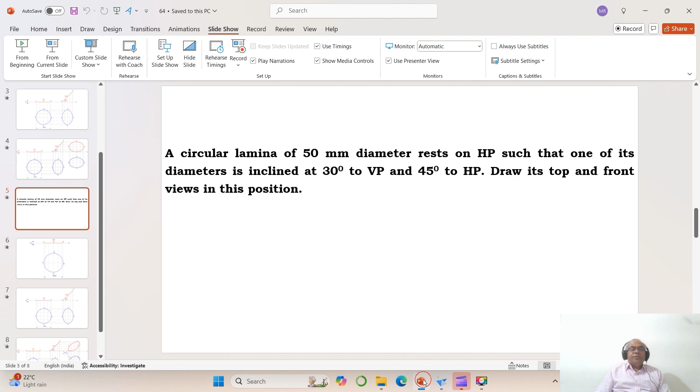Right click and go to move, disable copy, select this and place it wherever you want. Go to zoom window, bring it near to the screen. Before actually creating the drawing, make sure endpoint, intersection and horizontal or vertical are enabled and remove the center point. All other options should be disabled.

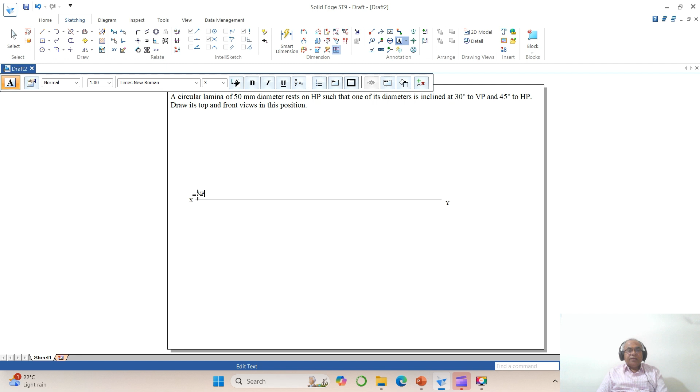First I need to draw the XY line. Go to line, select this and make it 0.05. Draw one XY line of any length and now go to text. Take the font as 3, put the caps lock on, type X, and here it is Y, here capital VP and here capital HP. Right click, then go to zoom window.

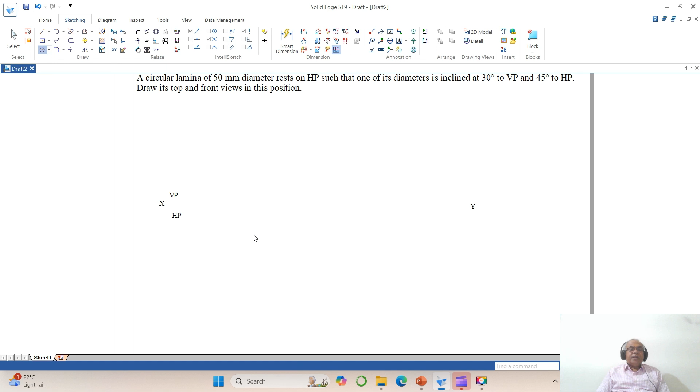We need to draw the 50 mm diameter. So go to circle, take some arbitrary point, take the diameter as 50. Right click. Then go to move, disable copy, select this and take it inside here. Then go to fit. Now select to check the diameter. The diameter is 50, so the radius is okay.

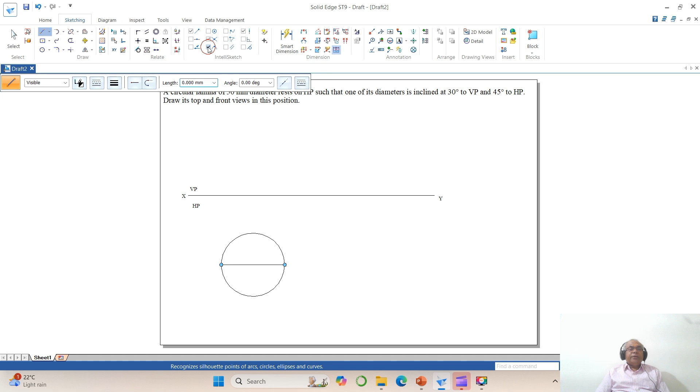Now we want to draw a horizontal line to this. To do that, enable center point. Go to line and click on the center point, or we can go to silhouette point first. Silhouette point draws from quadrant to quadrant. Once you do that, remove silhouette point and enable center point. Now go to the rotate option, enable center. Select this, take the center of this.

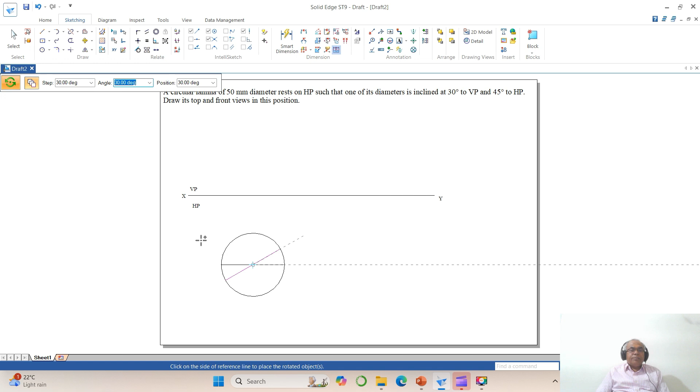What is the angle you want to rotate? Since I want to divide it into 12 points, 360 by 12 is 30. The position is 0 now. The step you want is 30 every time. So enable copy now. Click, and now click on this, then this, then this. So you have divided this into 12 equal points. Now select this and make this 0.5.

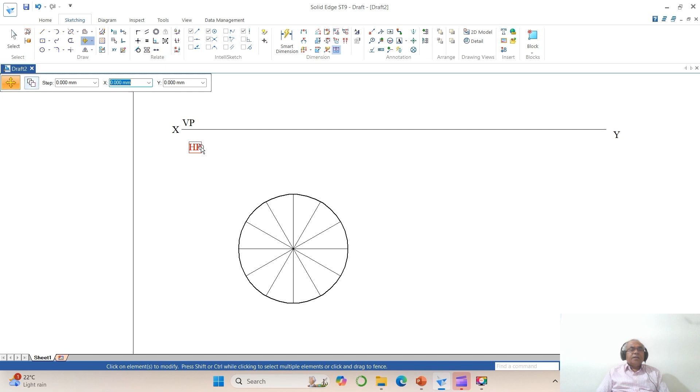Now we have the points. Go to move, disable copy, take X, VP and HP. Again go to text, type small letters a, d, g and k. Then go to move, select this and keep it here: d, then k, then g.

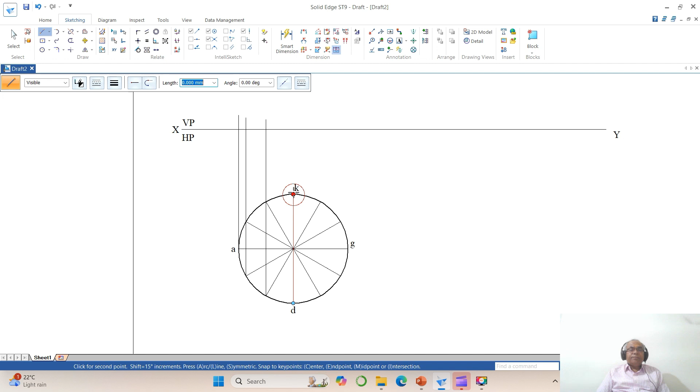Now we go for the line command. Draw a line from the endpoint to the XY line. Similarly from here, then from this point, and from here. Now go to trim. Trim this entire thing by keeping it like this. Now go to split. Split this line till here. Now select by holding this, make it 0.5.

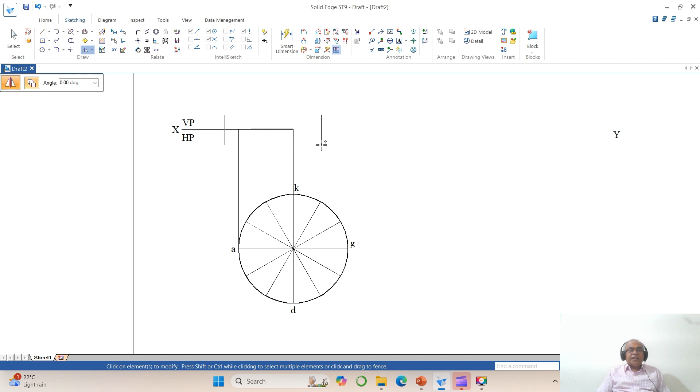Now split all other lines between these two. Split here, then split here. Now go to mirror, select by holding the shift key, select this entire thing, then this line and this line. Mirror, enable copy, with reference to this, copy it. Now we have all these lines. So 12 points we have divided.

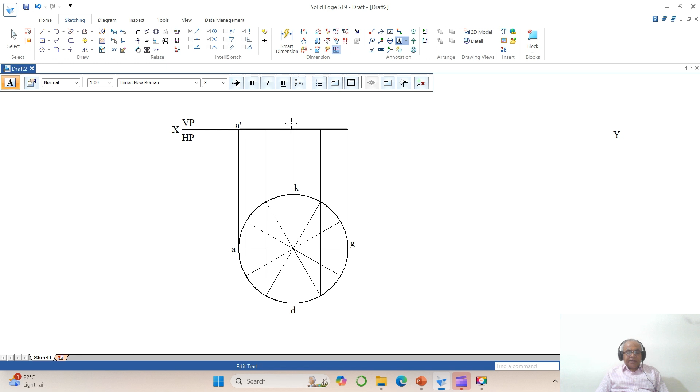Now go to text. Here type a dash, here d dash, then g dash, then k dash. Now go to move, disable copy. Select a dash, then place d dash and k dash, then g dash. Now we want to make it a group. To do that, I will go for the group command. Select this entire thing, which makes it a group.

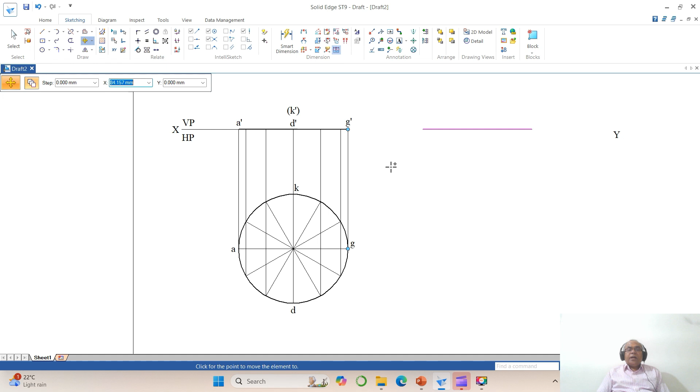Now I want to copy this to the second position. So go to move, enable copy, select this and you copy to the next position. By tabbing it, make it 0 and place it wherever you want. Okay. Now once you do that, you go to fit.

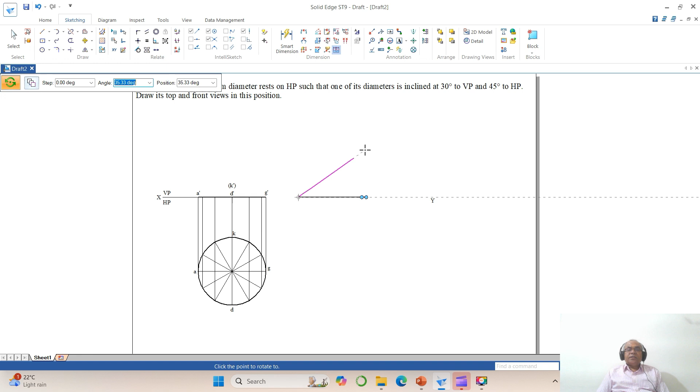So one of the diameters is inclined at 30 degrees to VP and 45 degrees to HP. Now you go to rotate, disable copy, you select this entire thing, take this endpoint to this endpoint, the rotation angle is 45 degrees to HP. Okay. Click right on this. And then go to line, take endpoint and draw a horizontal line of any length. So then go to move, disable copy, you select this and move it here.

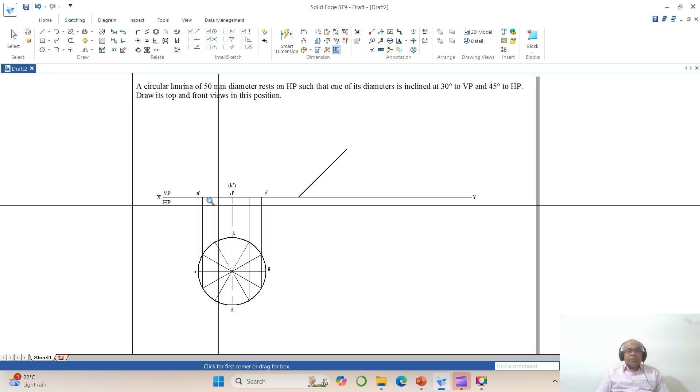Okay. Now you come down to zoom window. Now you go to line, take endpoint and draw a horizontal line. And the first endpoint is this, which is the intersection point. And similarly from here you take endpoint. Okay, then go to trim corner between these two and also between these two.

Now you go to move, enable copy, you take A dash and you keep it here. And similarly you take G dash and you keep it here. Now I will go to line, you take endpoint and draw a vertical line. So then go to move, take D dash and here you take K dash. Okay. This point is over.

Now we go to line, take this endpoint and draw a horizontal line and similarly from here you take this and go to trim corner between these two and also between these two. Now you go to line, draw a line from endpoint of this, similarly from endpoint of this, which is these 2 points. These 2 points will start from here. This is the one and also this is the one.

How do I know that it is these 2 points? You can see after A dash you have the next point. After this you have this point. This point and this point is same, which is that point. That point lies here. So that is how we are identifying. So then go to trim corner. So here I will take these two, then I will take these two, then I will take these two.

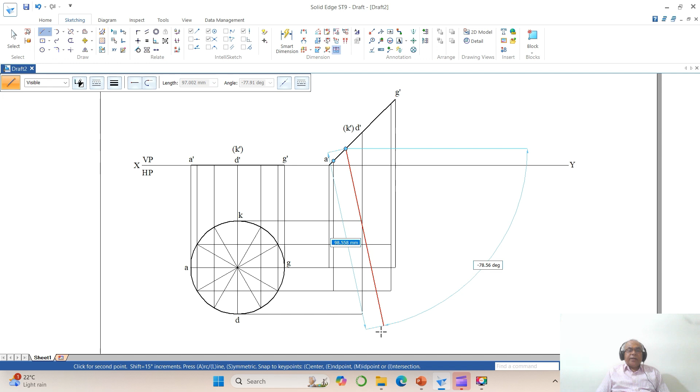Okay. Similarly, go to line and you take this endpoint and similarly from here, this endpoint, you draw this. Then you take the end point of this. Similarly from here, end point of this. Okay. Now you go to trim corner between this and this, and similarly between these two, and similarly between these two. Now we have completed the projections.

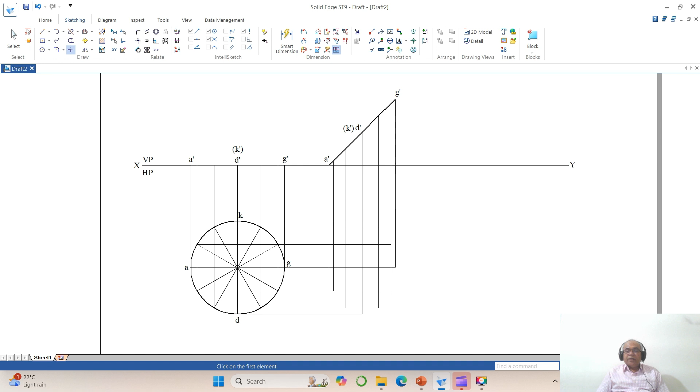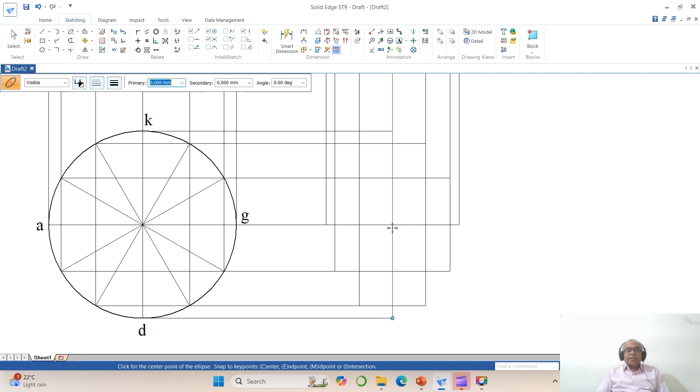Once you do that, now you want to go to ellipse. So go to circle. In ellipse by center point, you take this intersection to this end point. So what is this distance? It is going to be 25. Okay. Sorry. Go to ellipse by center point. You take this intersection point as the center and this end point for the primary axis. Now the secondary axis is this line, okay, which is 25.

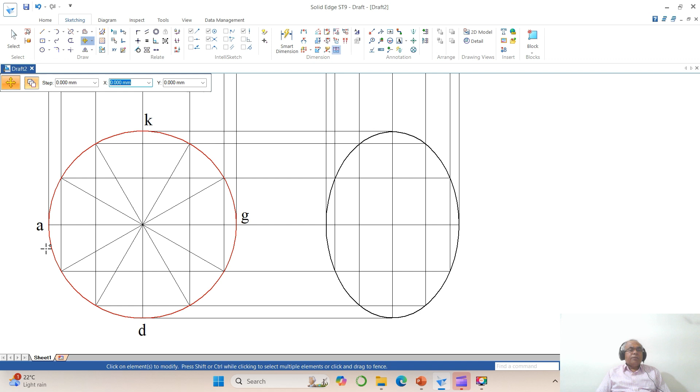Okay, now we have the point. Now you go to select. By select this, make it 0.5. Now I want to split these things. So you go to move, okay, enable copy. You take A and keep it here. You take D and you keep it here. Then you take G and you keep it here. Then you take K and you keep it here.

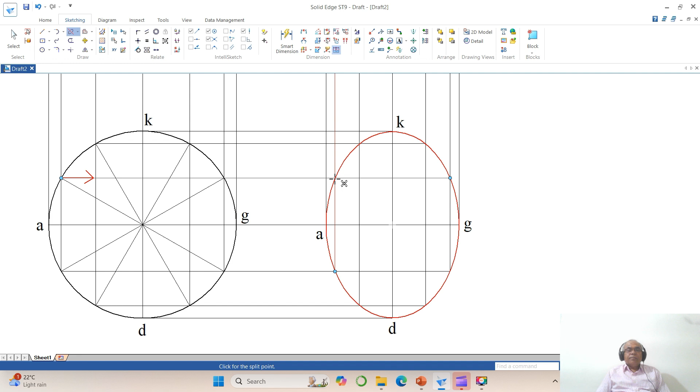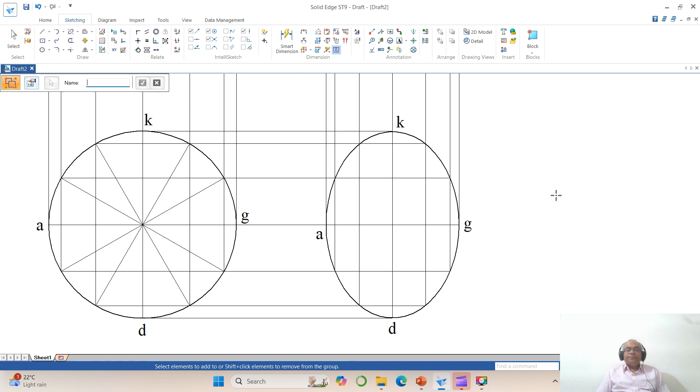Now you go to split these horizontal lines first. Okay. Then take all horizontal lines. Now you take the vertical lines. Now you go to group, select by holding the shift key, you select this and then you select all horizontal lines first. Then you select all vertical lines second. Okay, once you do that, you group it. Now we have fit.

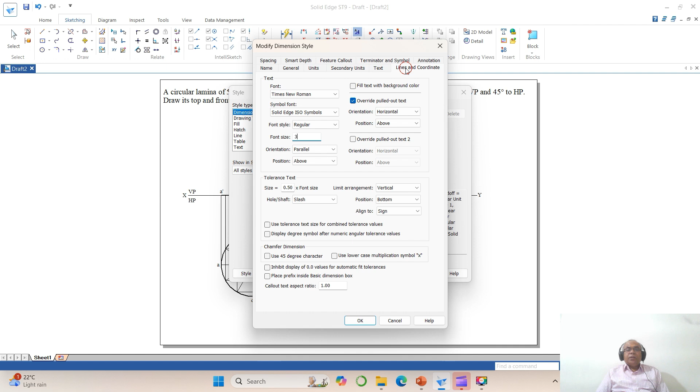So now I want to go for dimensioning styles. Go to ISO, click on modify, go to general, make everything black. Okay, come down to text, make it Times New Roman. You take font size as 3, then go to lines and coordinates, make it 0.1 and come down to units. So angular degrees is rounded off to the second decimal point. Okay, and apply.

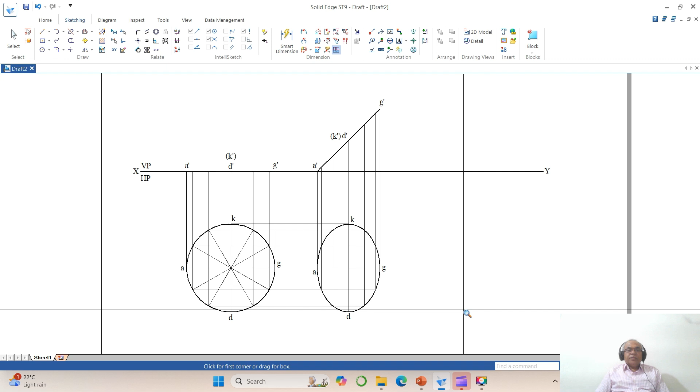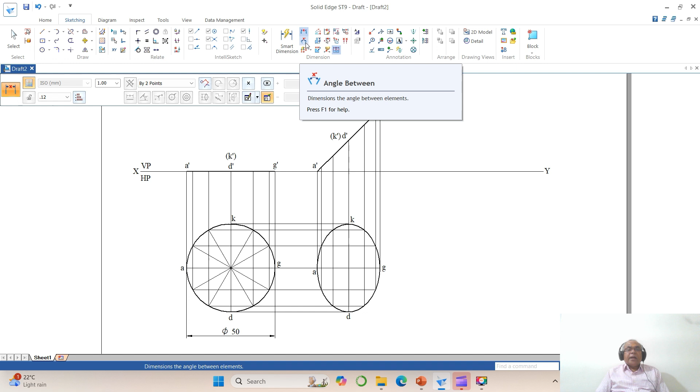Now I want to show the dimensions. So to show the dimensions, go to distance between, you select on this and you select on this. So I want the diameter symbol. You just go to this, click on diameter, okay, so you are going to get the diameter symbol now. Now we want to go for angle between, select this line and you select this line. So I don't want the diameter symbol there. So go to clear and say OK. Now we will get only 45 degrees.

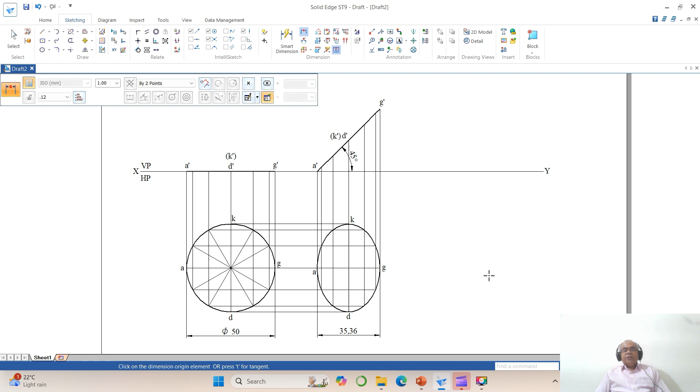Now I want to show this dimension. So to do that, you just go to distance between, select this line and this, you are going to get it as 35.36. Now 45 degrees to HP is over. Now what I want, 30 degrees to VP. So I will go for a line command, consider any point. From there I am going to draw about 100 mm. The angle is minus 30.

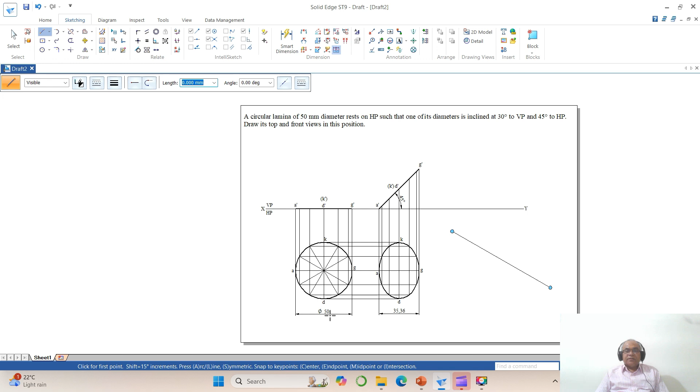Okay. Once you get this, on this, first I need to take this 50 mm diameter. So how to do that? So here first I will go for point on element, enable that, and go to arc command by center point, select some arbitrary point.

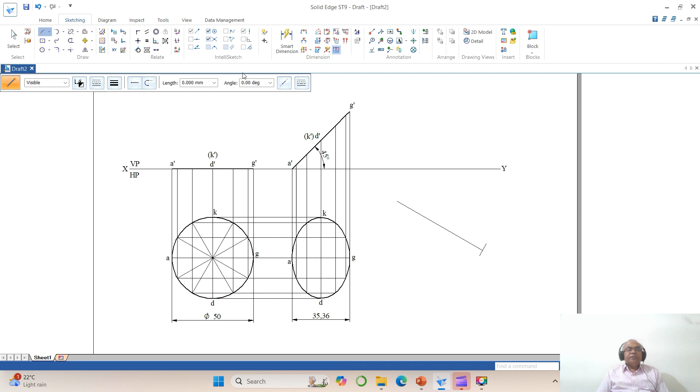From there, what is the radius you want? 50. What is the sweep angle you want? 10 degrees. So you click on this and you keep it on this. Now we have trim, go to trim, remove this, and then go to line, remove point on element, enable center point. So here you take endpoint and draw a horizontal line.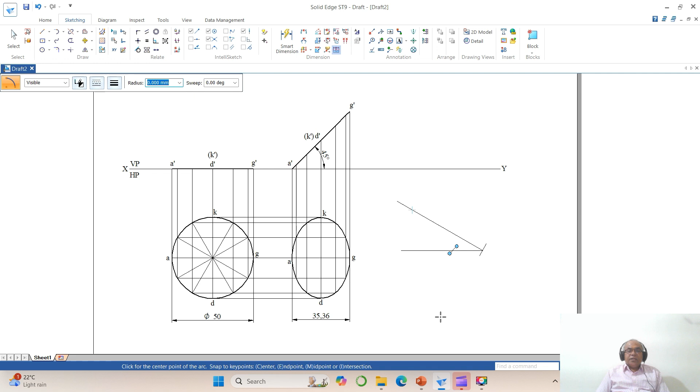Now to this I need to consider the second position, which is 35.36. Again you go to arc command by center. So select this on the circumference of the arc, then automatically you will get to the center here. So what is the radius you want? The radius is 35.36. What is the sweep angle? I want 10 degrees. Click on this and bring the arc on this locus line. Then once you do that, you remove this. It's not required now. It's finished.

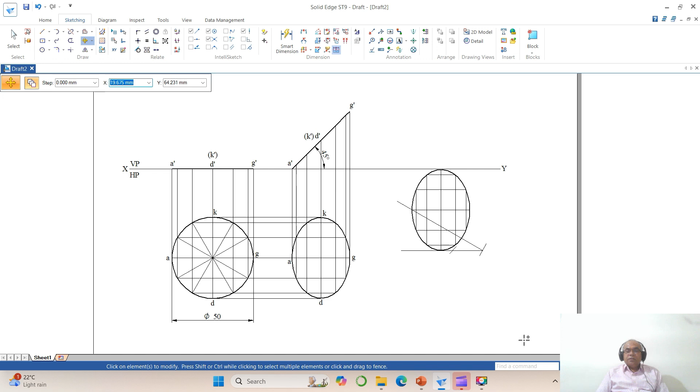Now I want to move. Move, enable copy. You select this. This endpoint should lie on the center of this. Okay, I got this. Then go to zoom window. So one point is fixed now. I will go to rotate, disable copy. You select this. I want this endpoint to lie on this intersection point. Okay. Now we have the drawing.

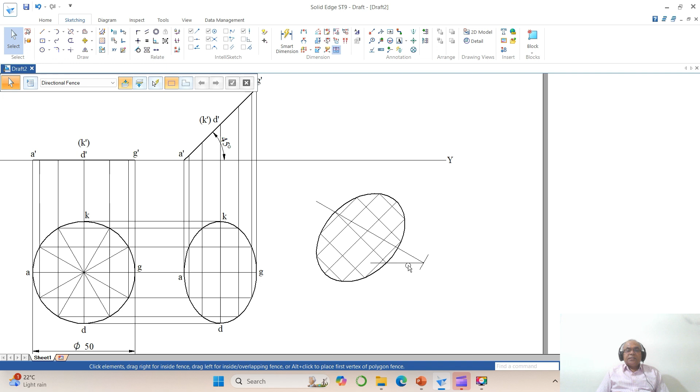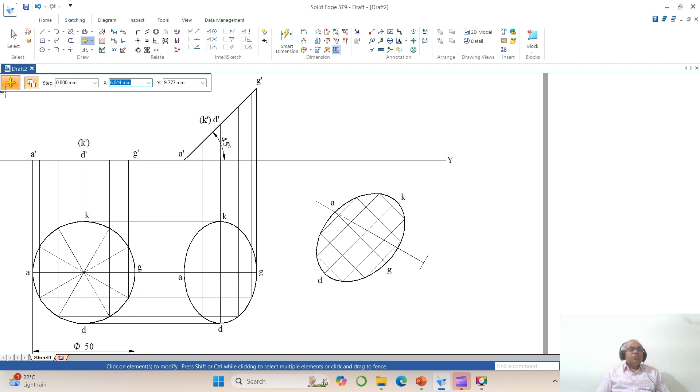You go to split this line. Go to erase, delete this. Okay. Now I will select this line and make it a dash dot line. Once you do that, now we go for move, enable copy. You select this A onto this, then D onto this, then G onto this, then K onto this. Now I want to start projecting it to the front view. So go to line, take endpoint and draw a horizontal line.

Similarly, go to line, take endpoint of this. Similarly, endpoint of this. Okay. Then go to trim this line here. Then go to trim corner between these two. Then you go to line, take endpoint of these 2 points. These 2 points will come on this side. Okay, similarly on these two. Then go to trim corner between this line and also between these two.

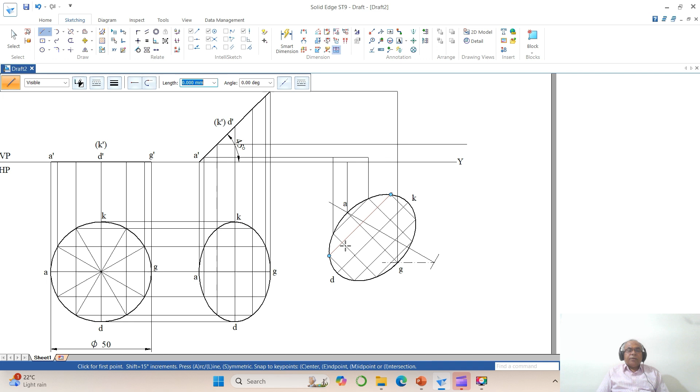Then again go to line, take an endpoint. Which are those 2 endpoints? That is this point and similarly on this side. And go to trim corner between this line and this, between these two now. Similarly, go to line and take endpoint of this. Which are those 2 endpoints? That is from here. Similarly from K. Okay. Then go to trim corner between this line and this line, between these two now.

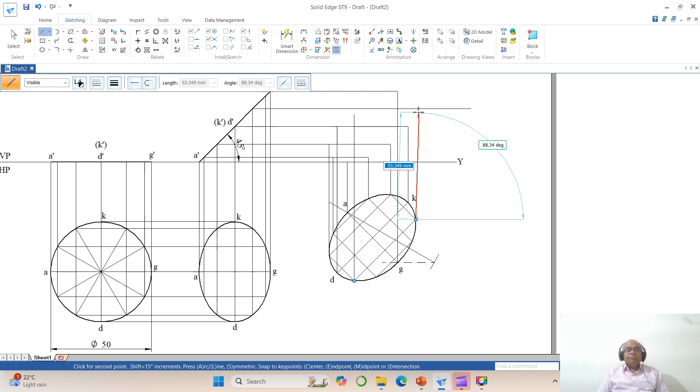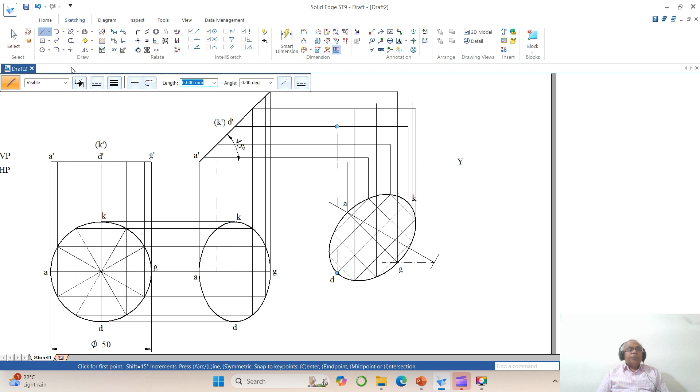Similarly, line, take endpoint. Which are those 2 points now? It is this. Similarly from this side. Okay, go to trim corner between this line and also between these two. Then go to line, take endpoint and draw a horizontal. Which are these 2 points? That is from here and also from here. Then go to trim corner between this line and this and also between these two.

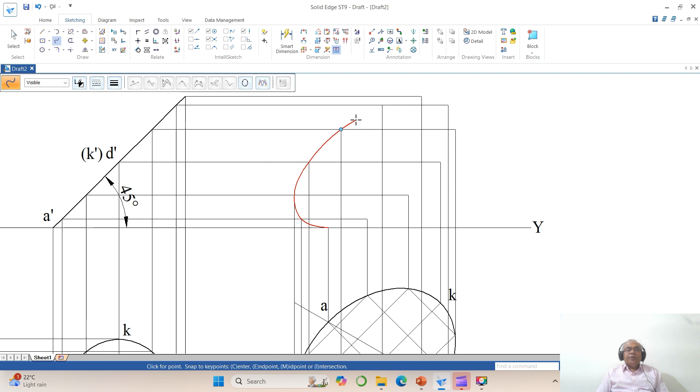So once you do that, now we have all these 12 points projected, and now you go to curve, take endpoint of this to endpoint of this to endpoint of this to endpoint of this. So you are joining all these by means of a smooth curve. Okay, then right click. Then select this line and make this 0.5. Okay. Now we need to write the text.

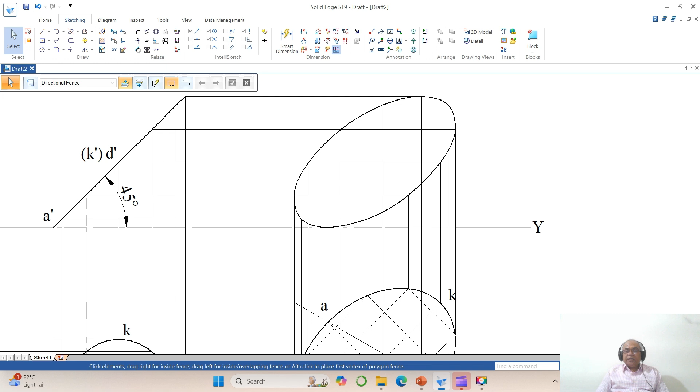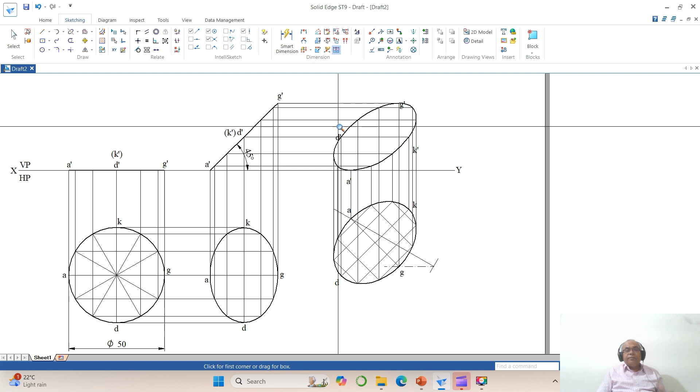To do that, go to text and here you type A dash, then D dash, then G dash, then K dash. Now I need to zoom and go to move, disable copy, take G dash, here D dash, here A dash, then K dash. Once you do that, we go for select by holding the shift key. Select this line and make this 0.13.

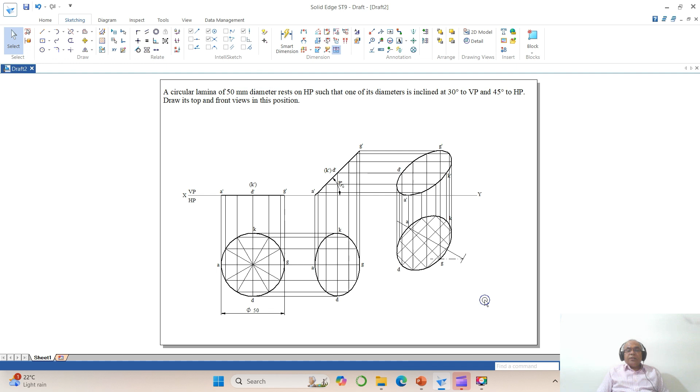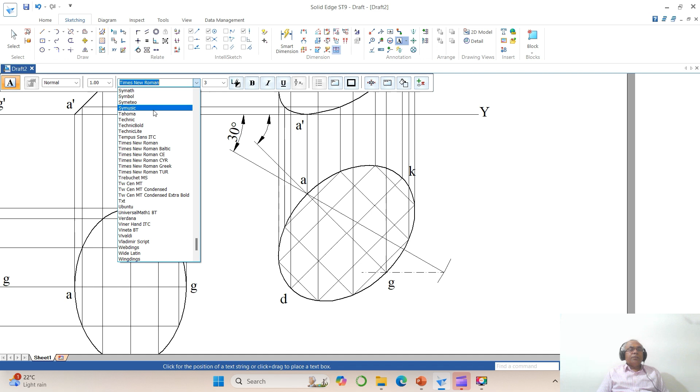Now we go to zoom window, bring it near to the screen, then go to distance between this line and this, which will be angle 30. Now again you go to nominal, make it blank. So again go to distance between this line and this. You don't show anything there, but go to text and select symbol, and here you type small letter beta, small letter b. Then go to move, disable copy, and make this the beta inclination.

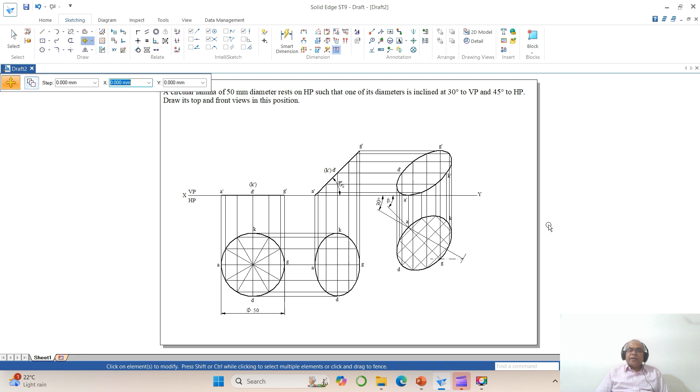So this is how you can solve the drawing using the Solid Edge software directly without drawing it in the sketchbook. This will save a lot of time during the examination. Always remember, whenever you have a circular lamina, don't try to do it as a manual drawing, because it will take a lot of time, and that time will be counted toward your final duration of up to 3 hours. So whenever a circular lamina is given, make sure you practice well to do it on the computer directly. That will help you save a lot of time during the examination.